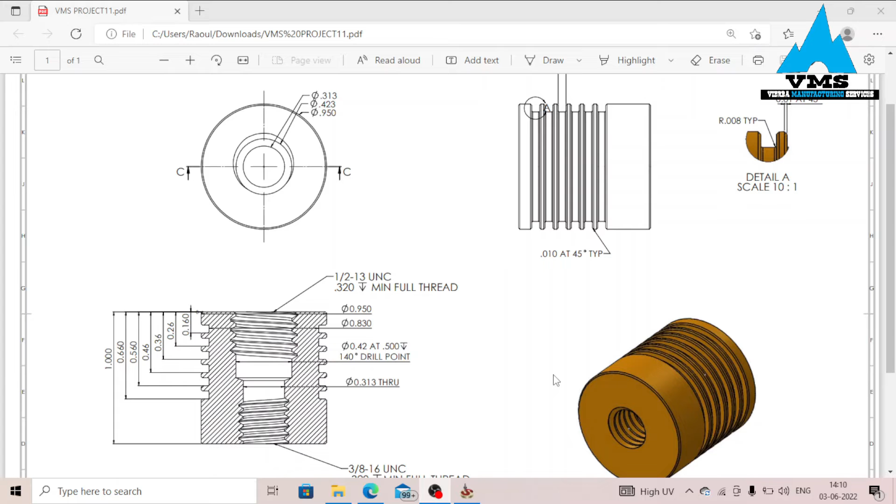We are working with the first angle projection with unit as inches and material as 6061 T6 aluminium. Firstly, we are going to design the external portion of the part, and later on we are going to introduce the internal threads. Diving into the project.

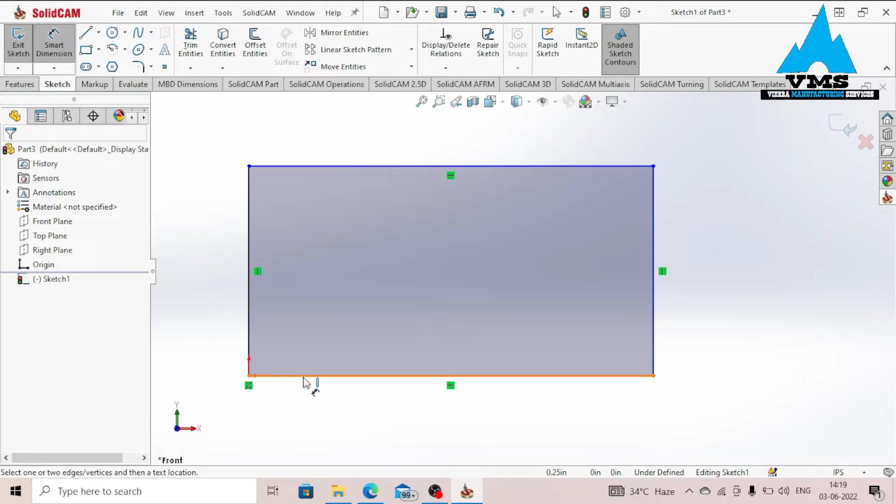Inch, sketch, front view, corner rectangle, smart dimension, the length from the origin to the end point, 1 inch.

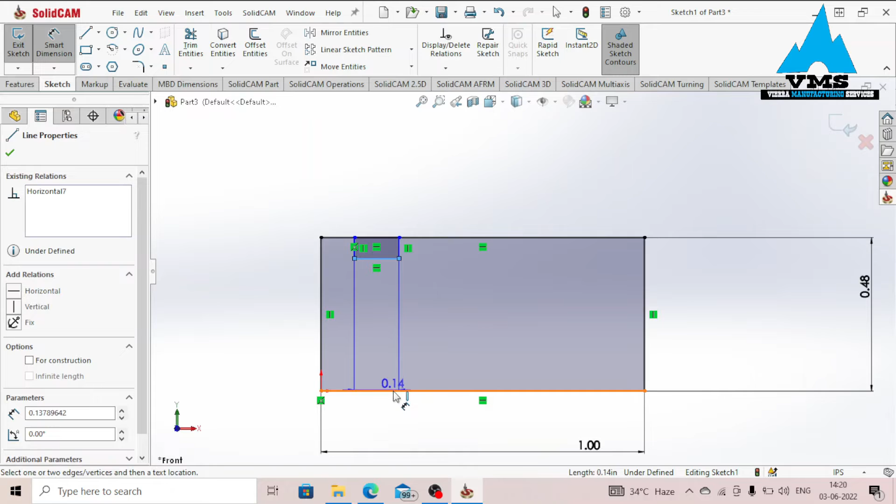The diameter, 0.95 divided by 2, corner rectangle, smart dimension, diameter 0.83 divided by 2.

Now the length of the rectangle, 0.06. The distance from the origin to the rectangle, as per our drawing, 0.16.

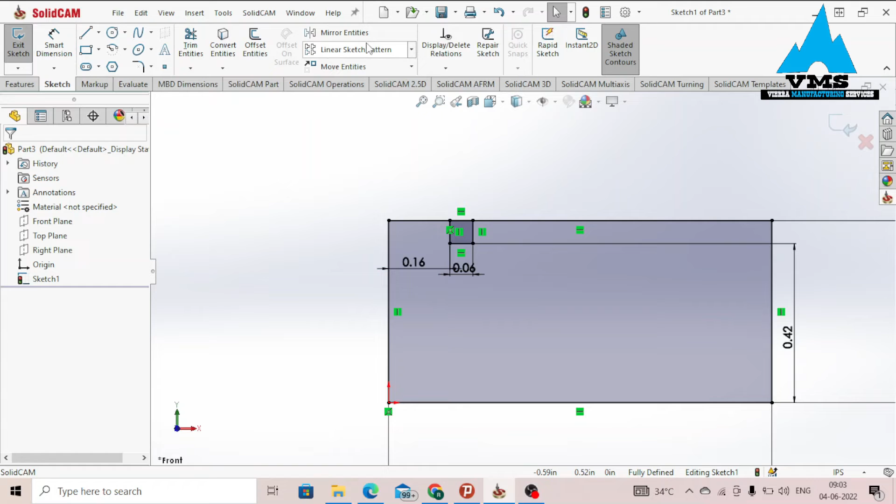Linear pattern, select this inner rectangle, 6 pattern, fine.

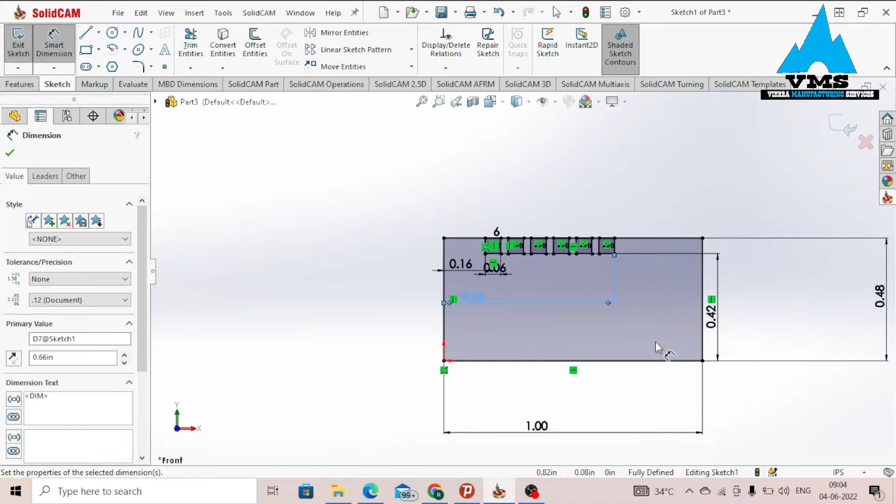Smart dimension, the distance of the last pattern to the origin, we got 0.66. Fine, the sketch is fully defined.

Trim entity, power trim activated. Stop sketch, feature, revolve base, revolve axis, this axis. Go for the green check.

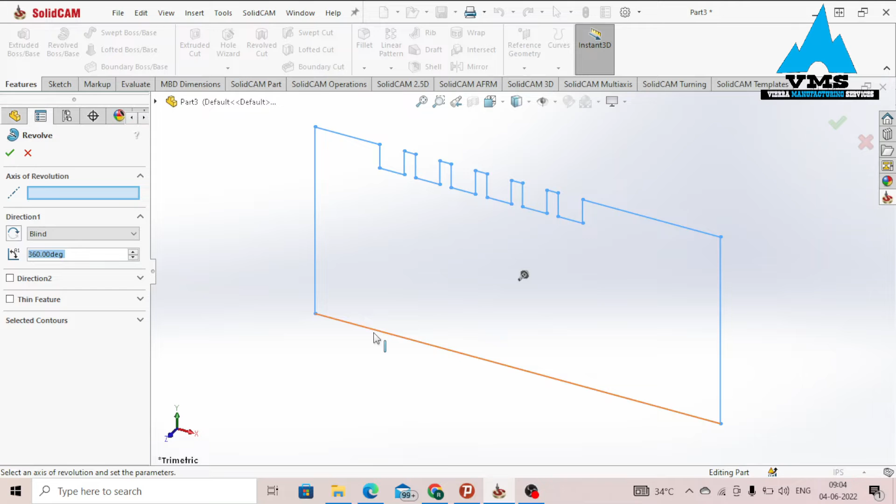Just come over here, edit sketch. Actually we have some fillets of 0.008 here, so we just have to add a fillet right now. Fillet command, 0.008.

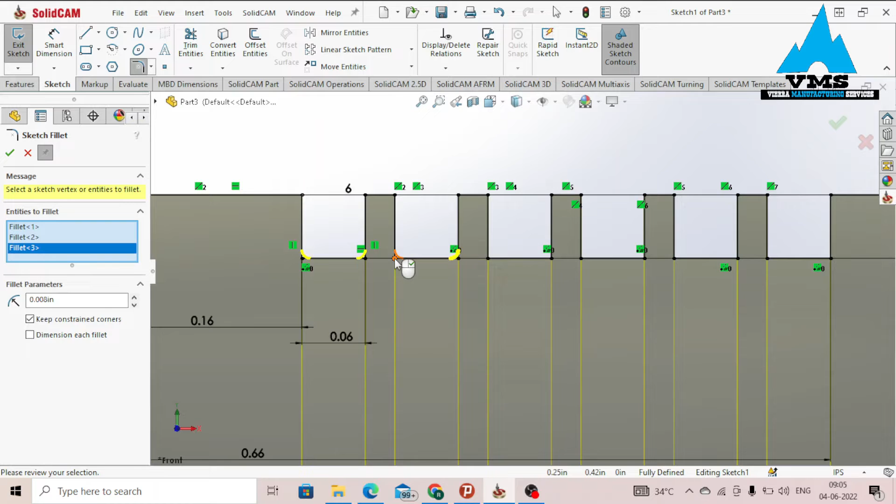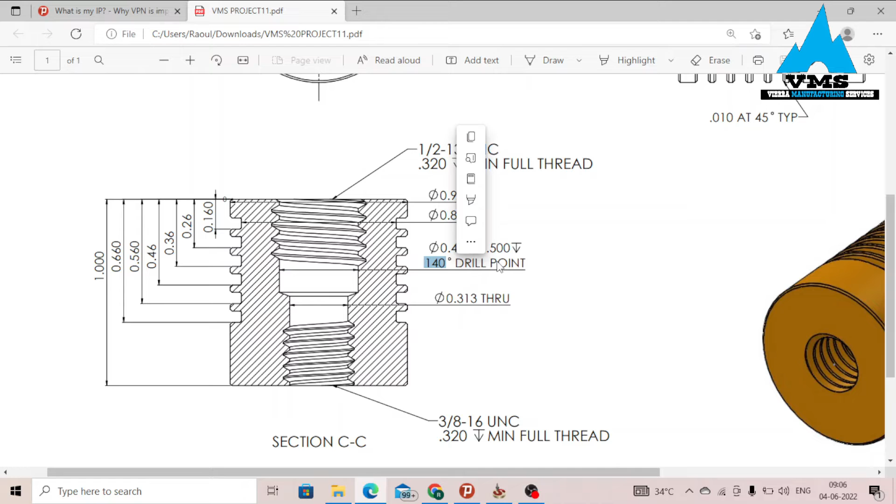Before making a thread, you need to drill a hole first. So firstly, we are going to drill a hole of 0.31 through the part. Then we have to drill a hole of 0.42 at an angle of 140 through a distance of 0.5. Later on, we are going to put threads using this specification. Equally, we got some chamfers of 0.01 at the surface and equally around the groove.

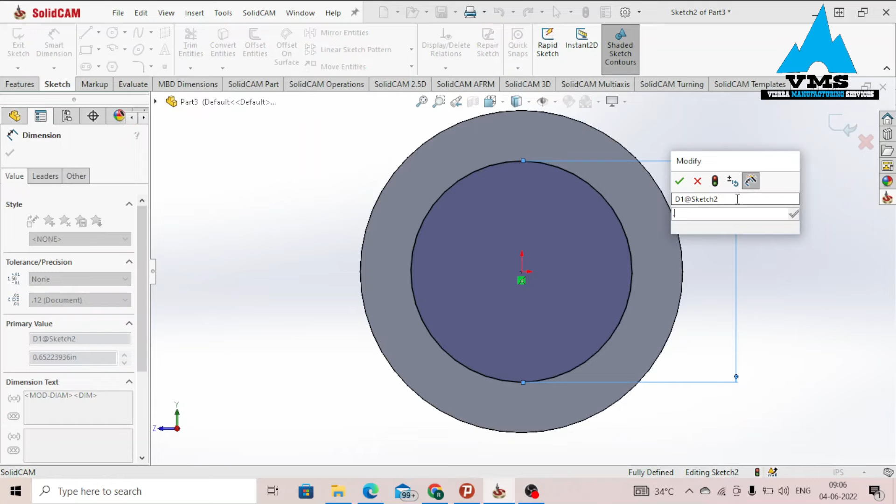Using the surface, sketch, circle command, smart dimension, 0.313. Feature, extrude cut, through.

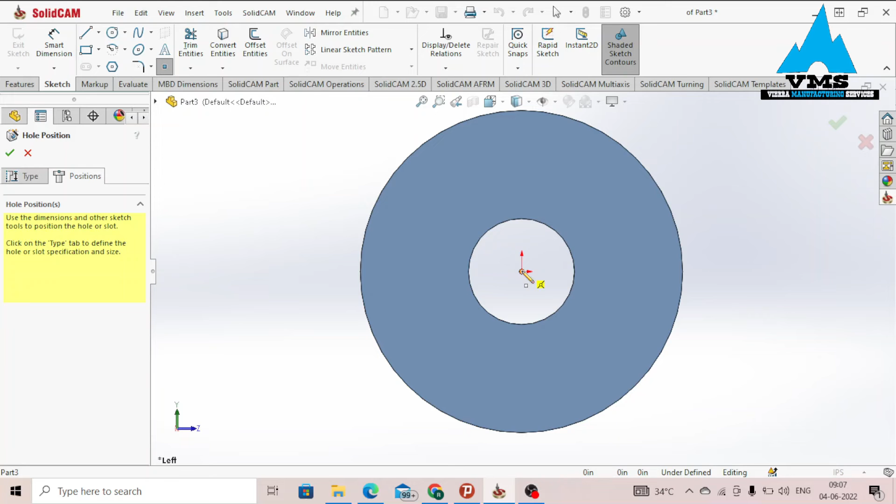Then the part, using the surface, hole wizard, using simple hole, inch, all drill sizes. Make sure this should be half, custom size activated. Now as per the drawing, 0.42, blind at a distance of 0.5. Position, select this face and the origin. Go for the green check.

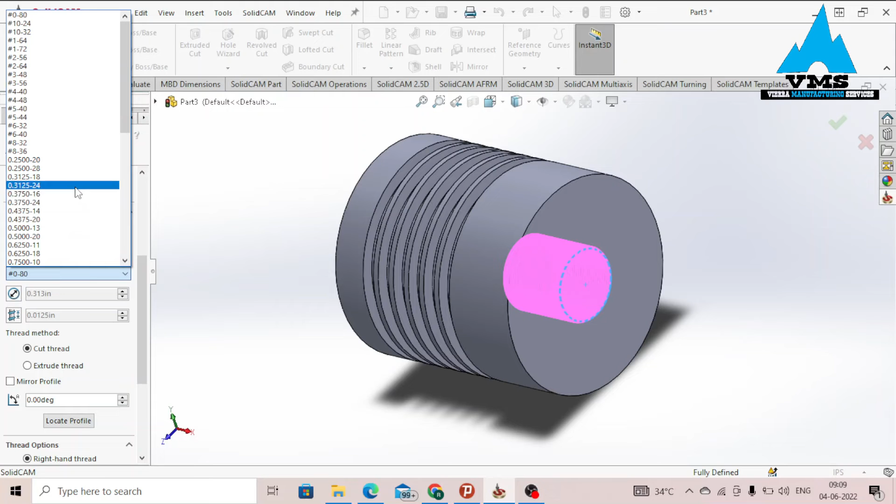Now let's speak about the threads. Thread location, this location, the thread depth 0.32. Thread depth we have 0.32, and then we have diameter of 3 by 8 and a threads per inch of 16. Type we have inch tap, size 3 by 8. 3 by 8 is about 0.375, 16. Go for the green check.

Now, however, we have this gap. So in order to solve this gap, we are going to use our trick about offset. So we just come over here, edit. We insert an offset value, let's say 0.2. It should be outward, so we reverse the offset. And we scroll down under blind, we add a value of 0.2. Go for the green check. The issue has been solved.

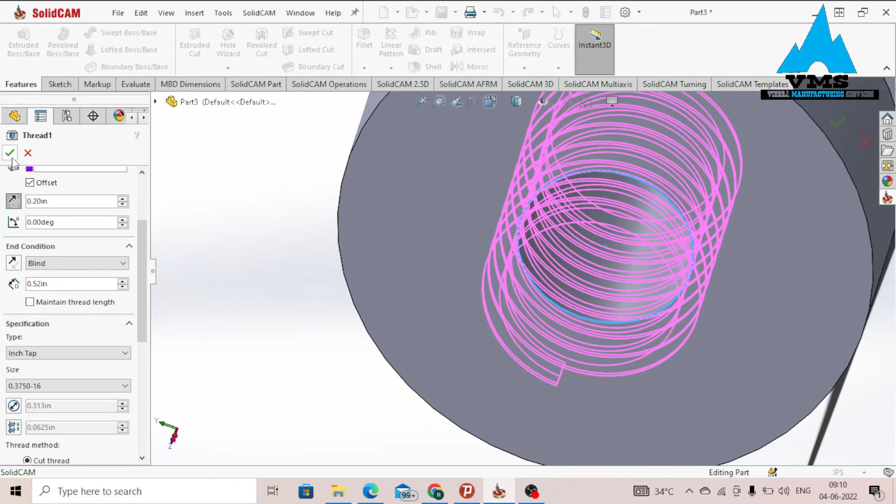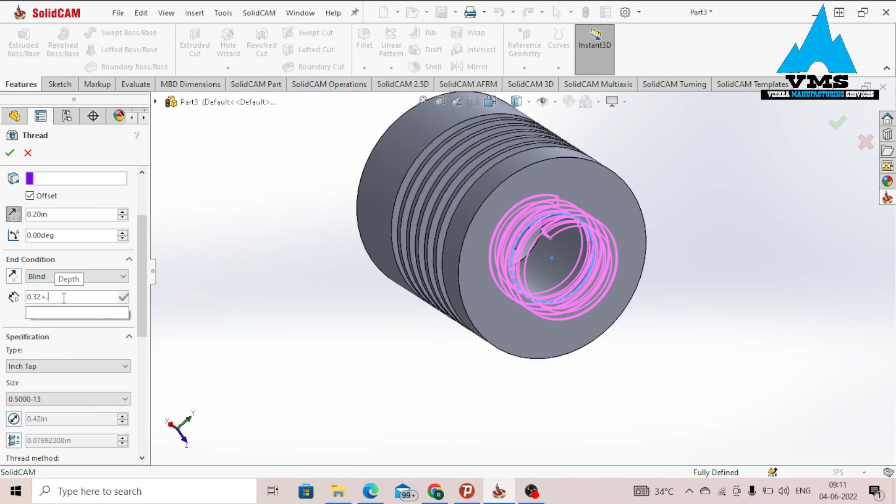Similarly for this side, thread, location, this location, blind 0.32, inch tap. The distance, we have half 13, 0.5-13. Now offset activated, 0.2, reverse. Just scroll down to the blind value, we add plus 0.2. Okay, go for the green check.

Chamfer 0.01, 45 degree, full preview. This edge, this grooves. Go for the green check.

With this, we are done with VMS Project 11. If you have any question regarding this project, do well to contact us by Facebook or by email, or even leaving a comment in the commenting box. In the next tutorial, we are going to be generating the M&G code required for VMS Project 11.